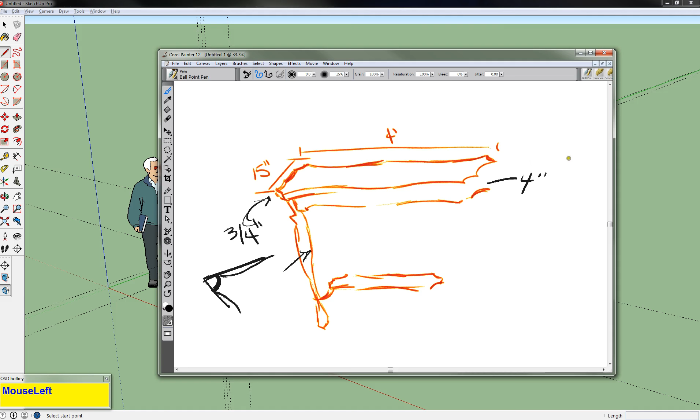So this is a really complicated shape and a very big thing, but it's actually cut out pieces of a simpler shape. So if we think about how we would build this if it were a real table, or how we would build it in SketchUp, those are very similar.

Things like the tabletop is 3/4 of an inch because we generally have 3/4 inch material, or that these 1x4s are probably either 4 or 3.5 inches and not much bigger. The actual table is built with the top and then the skirt pieces line up here, inset 2 inches on each side, and the legs actually sit inside them.

So that's how we're gonna make it. We're gonna make all these fun shapes later. So I'm gonna build it very simply out of components so that our work with all these shapes is gonna be a lot easier a little bit later. So let's go ahead and start that.

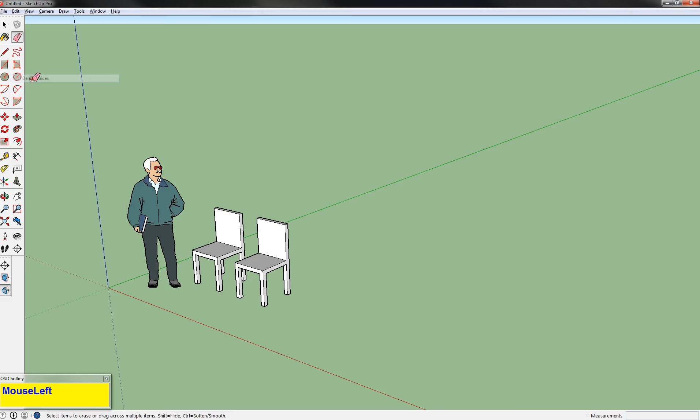The actual SketchUp model I'm working in right now is the same one I built these chairs in, and I want to show you that if you make a lot of guidelines, you don't have to grab the eraser tool and individually erase them. You can go to Edit, Delete Guides, and clear everything out at once. That can be a great time saver.

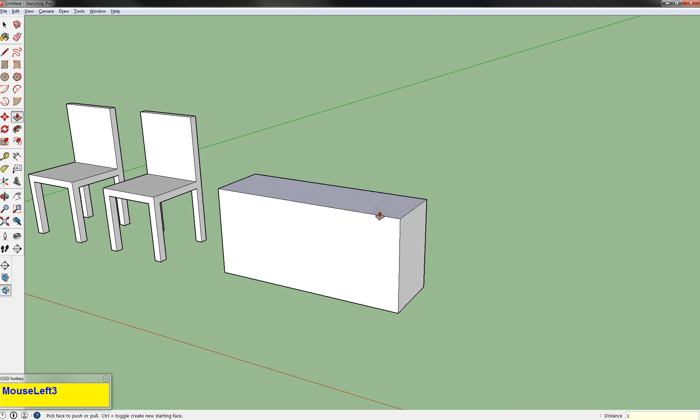So we're going to start on our table with just an overall bounding box of what the table is going to be. I'm going to drag the box this way, and notice that my longer number is first. So I'm going to type in 4 foot, 15 inches, and hit enter. Grab the push-pull tool and bring that up 36 inches. It's going to be the bounding box of our table.

Now, what I really want is the top of this box and the bottom of this box. So I'm going to take the eraser tool and just erase the corners. And as you notice, when I erase those corners, the actual surfaces of the sides just disappear.

Now grab our selection tool again, double click this top, and now it's all by itself, and I'm going to right click and make it a component. When you make something a component, you can rename it. You can name it table top if you would like, but it's not really necessary.

Make sure it says glue to none, and make sure it's clicked replace selection with component. Otherwise you're making a component that's going into your component library, which is a whole other rigmarole, and it's not actually in your model right now.

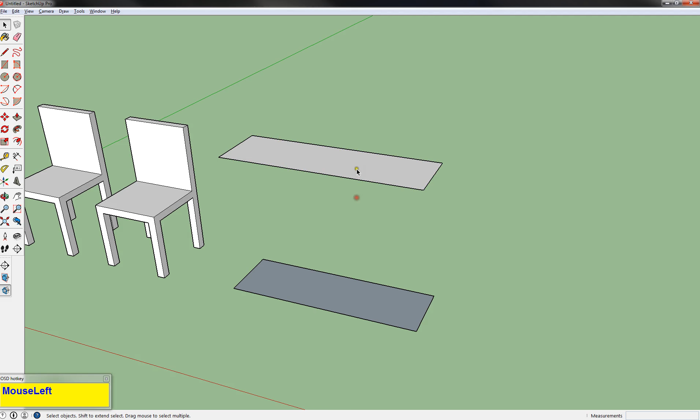So go ahead and click create, and now to edit it, to use the push-pull tool, if I click P, it won't let me edit it. That's because I have to double-click to get inside the component. So I'm going to grab it, pull it down, and type in 3/4 of an inch. Now it's the right size.

I'm going to grab my selection tool again and click out because our top is done for right now. We're going to edit it more later, but for right now it's done. So let's go ahead and make that skirt coming off of it.

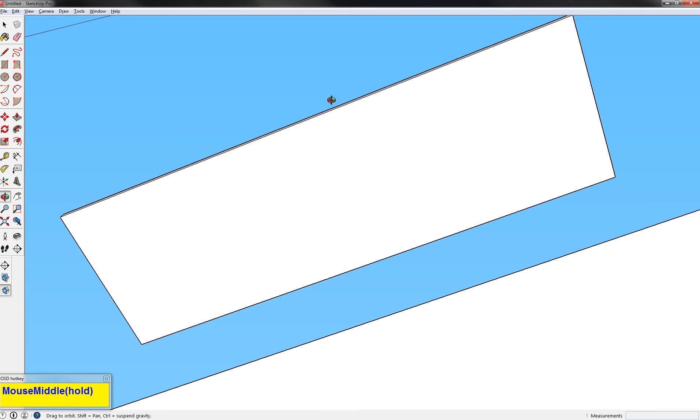I'm going to rearrange so I'm looking at the bottom of the tabletop and grab my tape measure tool. I'm going to pull in from the sides 2 inches on each side because 2 inches was a popular measurement in our chair, so why not stick with it?

Okay, and now because this side of the skirt and this side of the skirt are the same or will be the same, I'm going to make that a component as well because it's something I'm going to replicate. So I'm looking in my bottom corner, and this is 3 foot 8 inches by the depth of whatever I make it. So I can either carefully line that up till it's 3/4 of an inch, just like that, and carefully don't move my mouse and click.

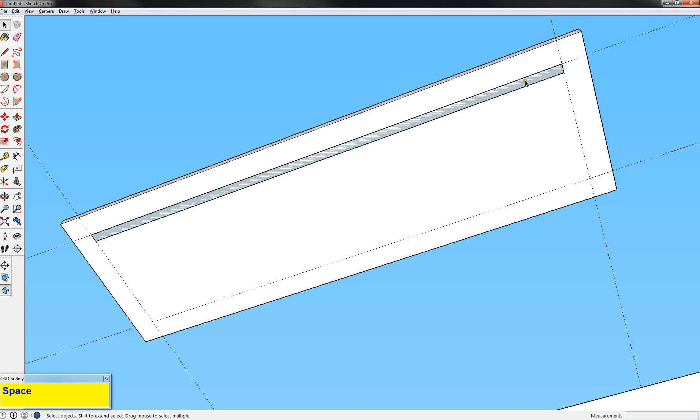Or I could type in the measurement. I'll do that for the next one. So I'm going to hit the space bar, double click while it's a flat object, right click, and hit make component, create. Now I could also make a component with this button right up here.

I'll do that with the next one as well. I'm going to double click inside, grab the push-pull tool, and pull it down 3.5 inches. Spacebar for the selection tool, click out to exit.

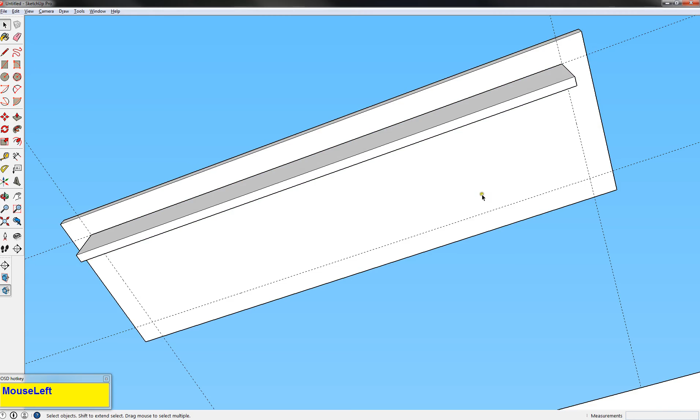Now I'm going to make the side skirt. So again, I can do this a different way. I'm going to go ahead and overlap this other piece that I've created. Because it's a component, it won't stick to it.

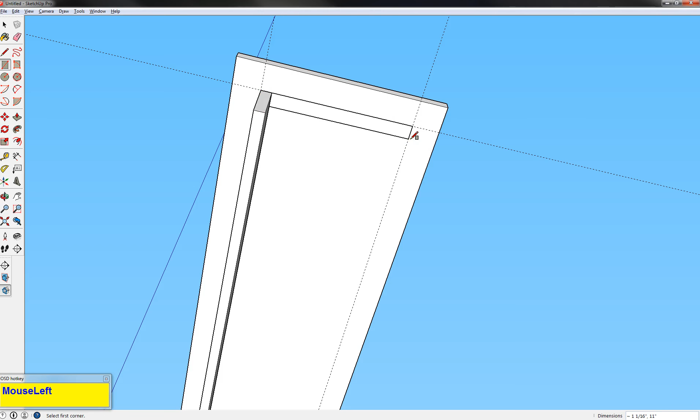So I'm going to click and drag out, and this time it's this measurement, the thickness measurement first, and then 11 inches. So I'm going to go ahead and click to make a box, and then type 3/4 of an inch by 11 inches, enter, and that's the right size.

I'm going to grab the selection tool with the space bar. I'm going to select it. When I select it, I have to click 2 times, but not 3 times, because 3 times might select these components. It doesn't because there's no excess geometry, but you want to do 2 times.

Then I'm going to click the component button, and I get the same menu. Click create. Double click on it to enter that component. Grab the push-pull tool with the P key, and now I'm going to reference this skirt because they're the same height. I'm going to grab the space bar and click out.

So I have my 2 skirt pieces. Now I'm going to go ahead and replicate my components while I'm here to go ahead and finish out that top piece. So I'm going to grab the move key and grab the relevant corner.

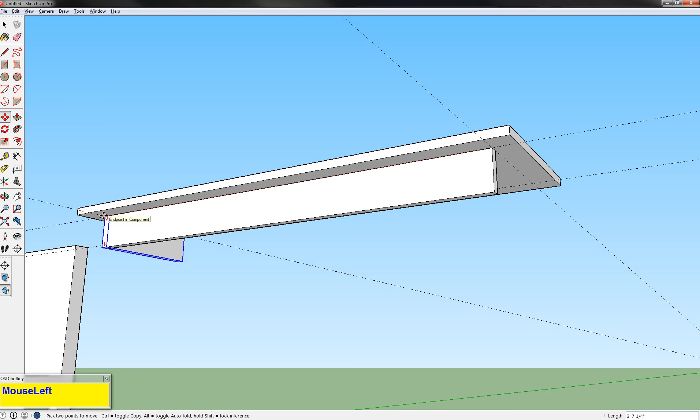I'm going to grab this corner, this piece, and put it right here. So I want to make sure I grab the right corner. I'm going to tap the control key so it's a copy and let it go.

I'm going to do the same thing over here. Once again, the relevant corner is over here. When you're using the move tool, you should space bar for the selection tool, select the whole object, and then M key to select the corner that you want to move.

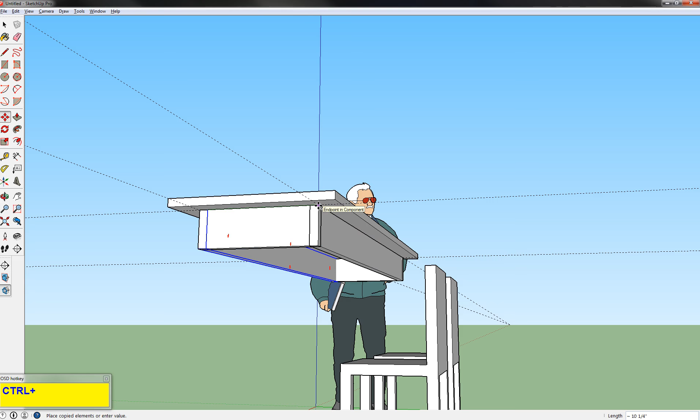I'm going to tap control again so it's a copy, place it right up against that corner, and click. Now I've got an enclosed, copied skirt that will be symmetrical to my tabletop.

Now I'm going to make the legs. And when I was talking about the legs being a little complicated, that's because they are. So I'm going to take the leg, and what I really want to do is place it right here. But other than freehanding and looking terrible, I'm going to use guidelines.

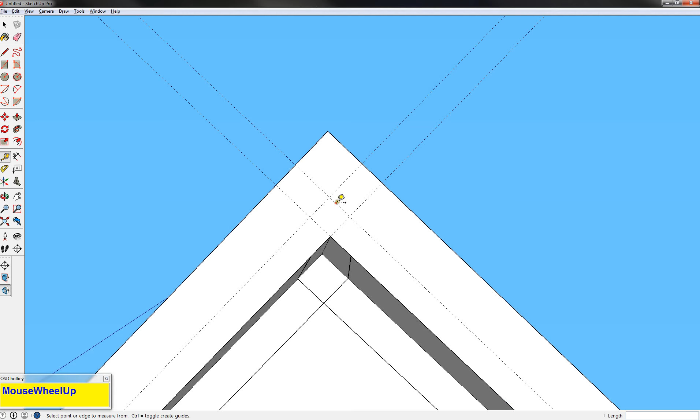So I'm going to pull a guideline out from each of these up against the bottom of the table, and I'm going to make them 3/4 of an inch. Now, that one snapped to 3/4 of an inch because I've made a 3/4 of an inch measurement several times now.

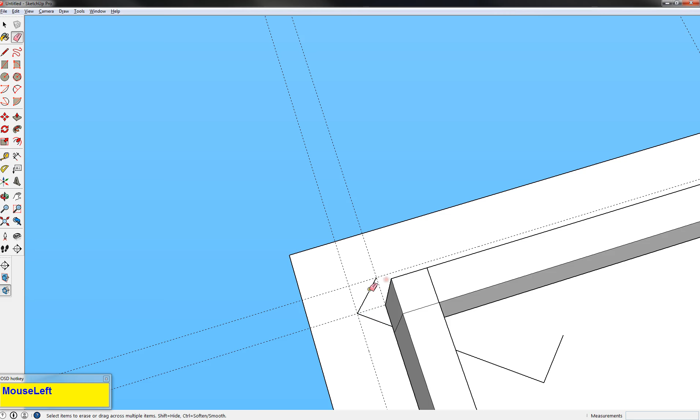I'm trying to find a nice direction where you can see what's going on here. But another thing I want to show you is that if I were to take my line and say, oh, I'm making something right here, oh yay, happy day, this line right here is not 3/4 of an inch. It's 1 1/16, and that is too wide for the lumber that I have.

So I need that to be 3/4 of an inch. So I'm going to grab the tape measure tool, and I'm going to connect those 2 sides, and I connect these 2 sides. And what that means is now I get the center. So I'm going to pull out 3/8 of an inch, which is half of 3/4, if you didn't know.

So I'm going to go out both ways, 3/8 of an inch. Now when I draw this line from this intersection to this intersection, it will be 3/4 of an inch. I will admit that was a lot of nerdy builder math that you probably don't know.

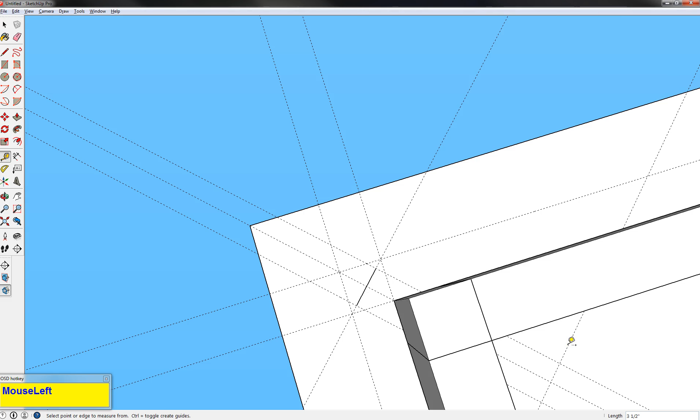I'm also going to make a guideline off this guideline, which by the way you can do. You don't have to use a real line from geometry to do it. And I'm going to make it 3.5 inches. Now I just pulled out to 3.5 inches, but just like everything else, you can look at it and tap 3.5 inches. Now I'm going to grab the line tool and I'm going to make it.

Now some of you might be thinking, why isn't she using the rectangle tool? I'll show you why. Because if I use the rectangle tool, it's trying to make a rectangle on the axis that we're in. So in order to make this rectangle, I would have to change the axis of our entire document and then change it back if I wanted a normal square. Now that doesn't always affect you, but sometimes for just one little piece, you don't want to go changing the axis for your whole project.

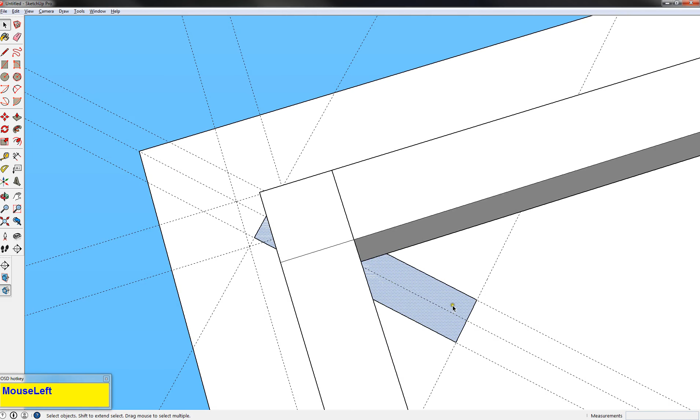Also, this is why I showed you the change guide or delete guides feature, because for this one piece, I have a dozen guides on the screen, and it can get really cumbersome. So I'm going to, once again, double click, right click, and make component. Great, now I have a leg.

I'm going to enter that leg, push pull, and pull it out until it's the height of our ground. It's a little hard to see right now, but there it is. There, it's the height of my ground. I'm going to click. We're good.

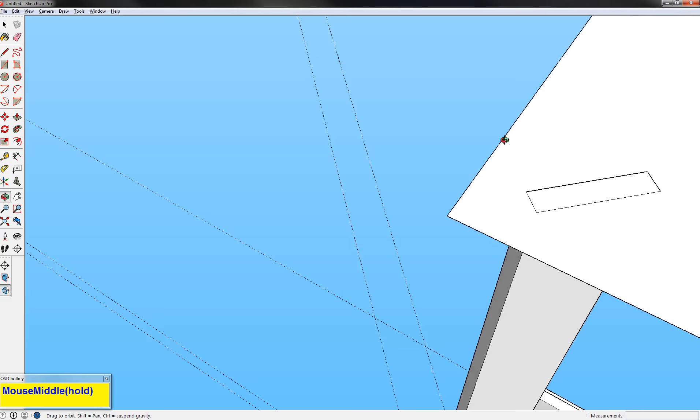I'm going to hit the space bar, click out of that component, and spend some time flipping myself back around to the right side of the world. There we go. I groan like it's actually difficult, but it's not because it's a computer.

Edit, delete guides. Now, to get the other legs in the same position that this one is, I'm actually going to grab this and make guides to the corners, and then pay attention to where this guide is. This guide is 1 3/8 inch in from the edge.

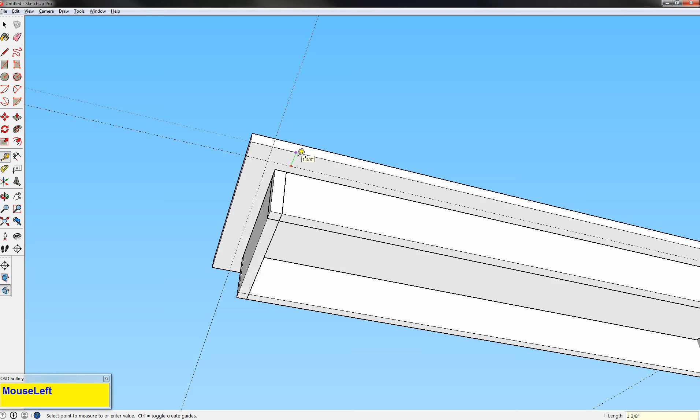So I'm going to make this guide 1 3/8 of an inch in, and this one is the same, 1 3/8 inch from the edge. So I'm going to do it as well, 1 3/8. You see how SketchUp again said, oh, I think I know what you want, and it was right.

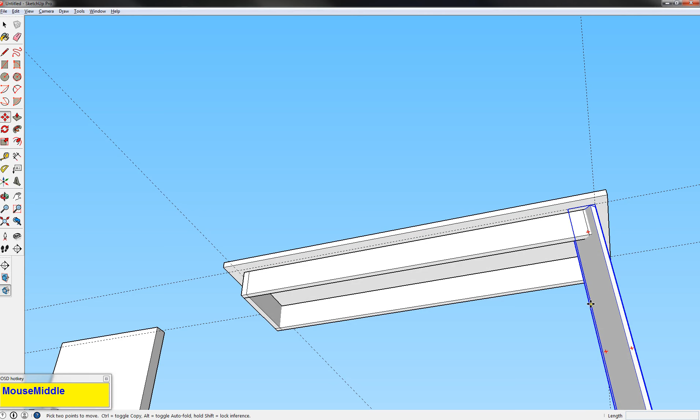So I'm going to grab this leg, and first of all, I want to keep the orientation of this leg the same, because once I cut it out in a pretty form, I want it to be in the right place. So I'm going to grab it, tap copy, and move it this way.

Now I'm going to look at the bottom of it, and when these turn up, I'm going to hover over one of them so I get the rotation tool, click, and spin till it faces exactly the opposite. I'm looking at, when I click on it, where the protractor lines are, and doing the same line on the opposite side. You'll feel when you click on it, every time you move, it wants to tick a whole section at a time. So I'm going to let that happen.

Now I'm going to zoom in, grab the move key, and get it situated right on those two guidelines. The other thing you can do is, again, when I talked about moving, you don't have to move an actual piece of the component. You can grab that edge of the component and stick it on the intersection.

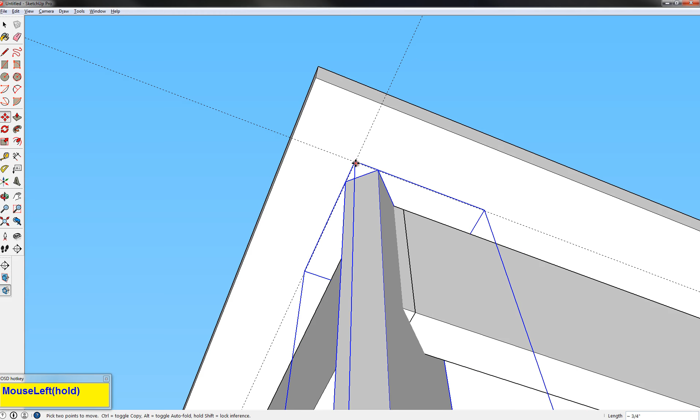Okay, I'm going to do that again, and it seems like a little bit of hard work. It seems like, why don't you just take it and do something else? The reason being, I want this edge to be the outside edge for each leg, so that when I cut them apart as components, they look the same.

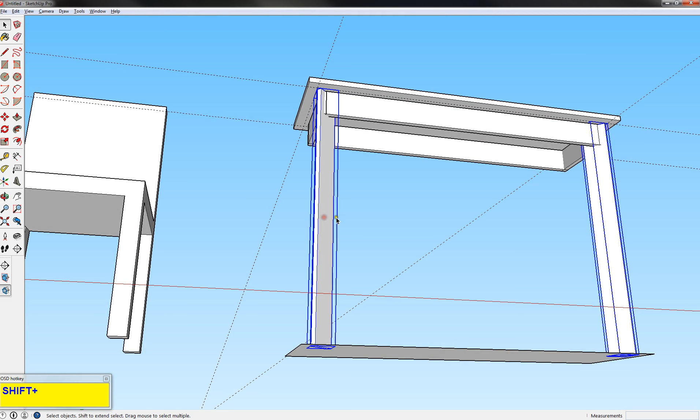So I'm going to grab these two this time, and I'm going to move them, grab them, tap the control key, and just move them back. Now both of them are facing the opposite direction, so I could rotate both of them at the same time and just switch their places.

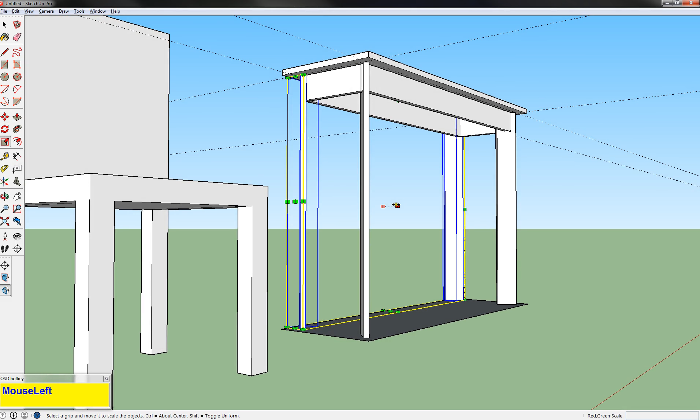There's another thing I can do though. I can grab the scale tool and invert them. By doing that, I'm just going to grab the center point and pull the other way. I need to make sure, if you look in the bottom right hand corner, it says negative 6.61. I need to make that -1. Hit enter. And now it's exactly inverted on itself.

It's exactly mirrored. So I'm going to grab the move tool, grab the end point in the component, and put it on the line. Now they should both be in the same spot, because if the front two are in the same spot, these two should be in the same spot. And they look pretty good. So we're going to go with that.

So that's where our legs will be. Okay? Now we're going to go to edit, delete guides, just so that stuff doesn't get in our way. Selection, click on the bottom so that nothing's selected.

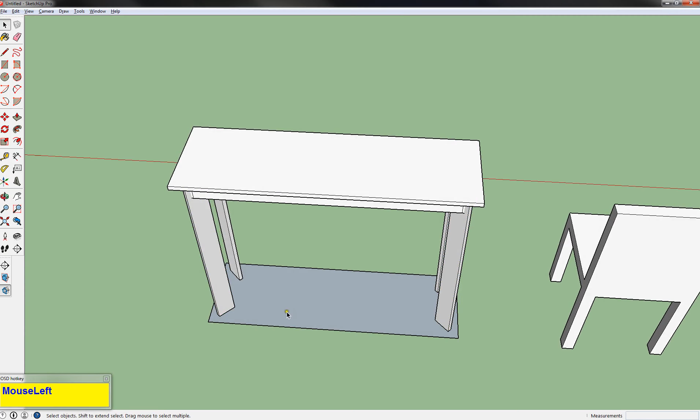Now I'm going to grab the tape measure tool. I'm going to bring our little support piece in from the inside of the legs 2 inches. So I'm going to go there and then come in 2 inches. I'm going to do the same over here, come in 2 inches, and do that on each side.

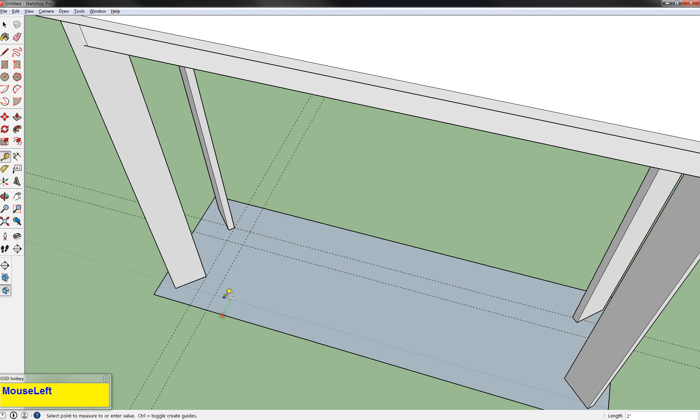I'm going to make sure I touch it, because if I don't anchor that on that edge, it will not be happy with me. Yes, I know this means the bottom piece is very small, and that is correct. You can see that time my thing snapped to it. I will say that looks smaller than I would like, but...

I'll fix that later. Now I'm going to grab the push-pull tool and pull it up, making that 10 inches high, because that's how far off the ground I said I wanted that support piece before. Now I'm going to grab the eraser tool and delete the ground, and delete the bottom, because I don't need it anymore.

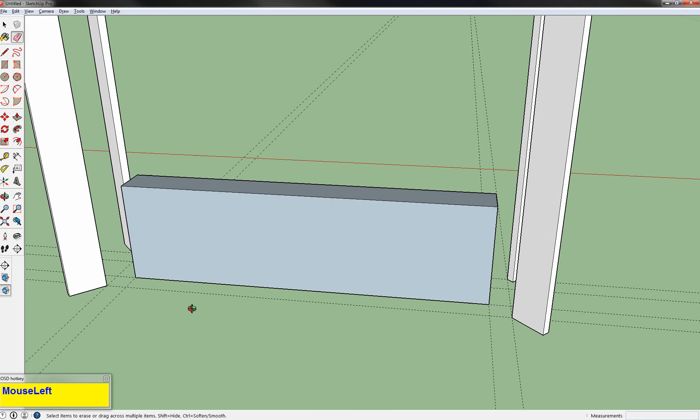What I do need is the bottom of this box though, so I'm going to grab the line tool, complete one edge, grab the push-pull tool, and push up. And I am going to go ahead and push all the way up.

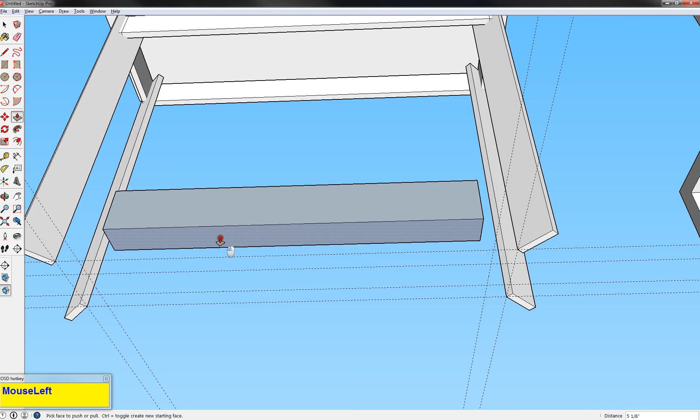No, I'm not. I can't tell where I need to push it to. I know with math that I need to push it up 9 1/4 inches, so I could go like this and go 9.25 inches, and it'll take it, and I know that's 3/4 of an inch.

The other thing I could do is grab the tape measure tool and pull down 3/4 of an inch, make a line, and then pull up to that. So either of those are completely possible. I like to err on the side of less math, and I'm sure you would like to do that as well.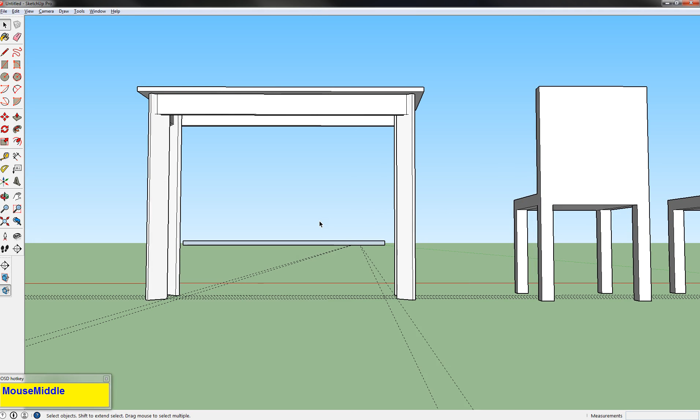Okay, so the last piece we need is the one connecting this piece to this piece. So here's what we're going to do: we are going to make a line on one of the legs.

We're going to double click on the leg and get into that component. We're going to make the tape measure come up 10 inches, because we know the top of this is at 10 inches, right?

And we're going to come down from that 3/4 of an inch. There we go. And that's where we're going to make a line. Oh, I'm sorry - no, that's fine.

I was going to say we should not do this in the leg component because it's a separate thing, but we can build them at the same time. That's not a problem.

So I'm going to make a rectangle on that surface. Now I want to point something out: do you notice how it's allowing me to make a rectangle in this way? That's because actually every component has its own axis, and that can get a little confusing. So just roll with it, because it's trying to help you.

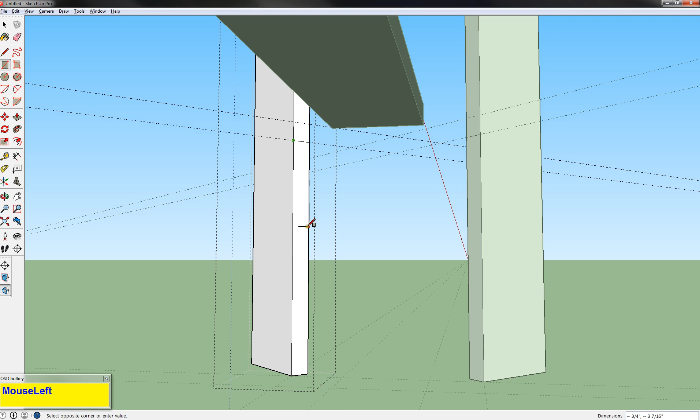We're going to make that 3.5 inches, and this is another one of those times I'm just going to move it until it says 3.5 and click. I'm going to push-pull and pull it until these two pieces touch each other like that.

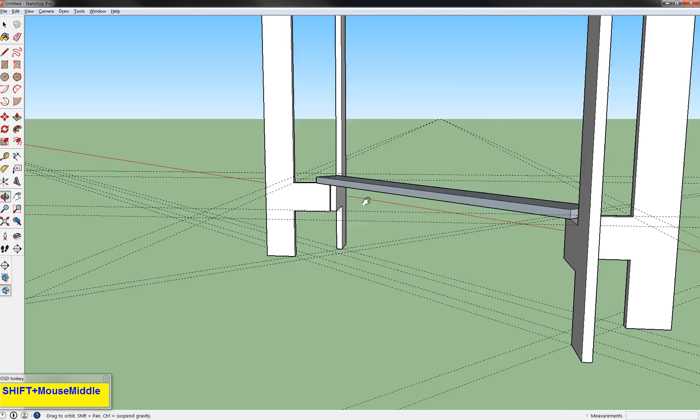So our lovely legs now have a connector to the center support piece. Also, I want to point out that we made those guidelines right there, and they're in all 4 legs, in all the components. You notice how it's making a really interesting pattern, like a Union Jack. So that's one of the reasons we want to make sure we delete guides every once in a while - otherwise we're just going to get a whole lot of stuff in the way.

Now, when I said before that this is a little smaller than I'd like it to be, it's a little smaller than I'd like it to be. So I'm going to go ahead and take the push-pull tool, and I'm going to pull it out an extra inch, and I'm going to go ahead and do that on all sides.

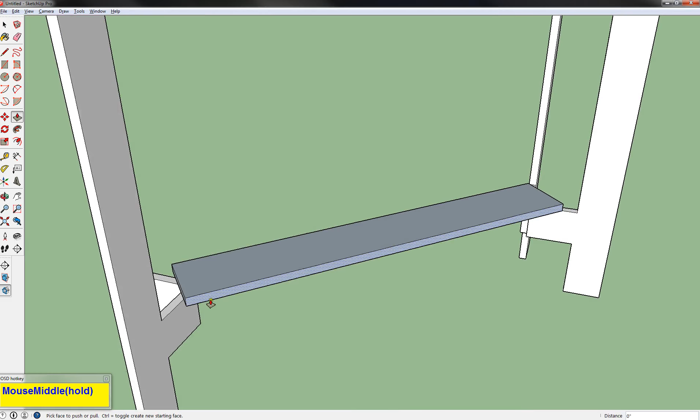So after I did it once, I'm just going to double-click on the other sides, but I need to make sure I'm selecting those sides. When I said Control-Z, I was still selecting the first side for some reason. All right, so that's a little better, okay? So that's our table, very simply.

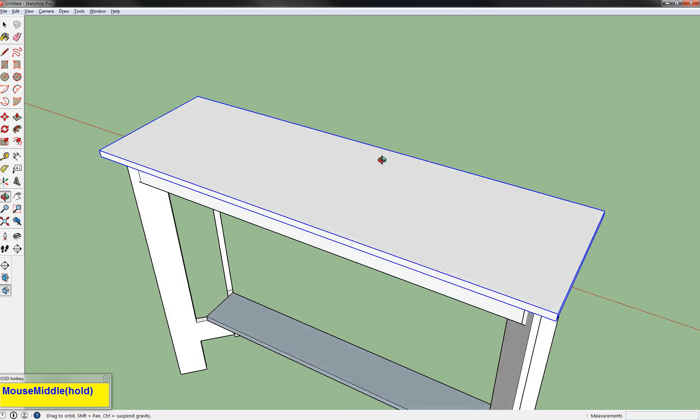The other thing we want to do is make our tabletop actually 4 sides. So what I'm going to do is double click to get into this component, take our tape measure, and make a guideline to the center, and a guideline to the center.

I'm going to grab my push-pull tool, take this side and push it to that guideline, then take this side and push it to that guideline. I know this looks really weird.

Bear with me. I grab the selection tool and click out. Now I'm going to click back in and take the eraser tool, and instead of erasing that side—that does not work, right? Control-Z. I am actually going to hold shift and erase that side.

What that's actually doing is just hiding geometry, not erasing it. But when I'm done, I don't want those lines to appear, so I'm going to go ahead and just hide it.

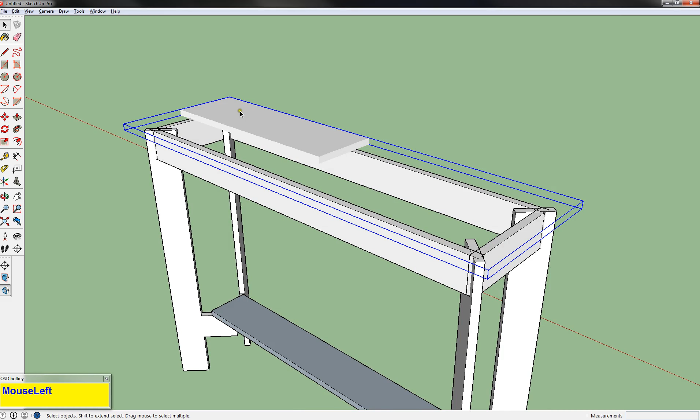So now I'm going to take this. First of all, it's still really big. I'm wondering if there's hidden geometry somewhere that's keeping it so big, but we'll look for that later.

I'm going to grab the protractor tool and grab the center of this piece. Just like the move tool, the rotate tool can replicate things. So I'm going to grab it, and grab this corner here.

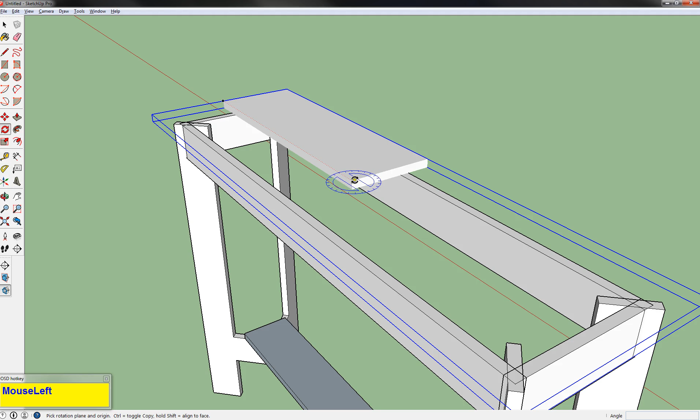Selection tool, select, rotate. Oh, I grabbed the tape measure protractor tool instead of the rotate tool.

So I'm going to click the center, click the extreme, and start to rotate. In addition to rotating, I can hit copy and get a copy. I'm going to rotate it until it's perfectly over here, and now I get the opposite corner.

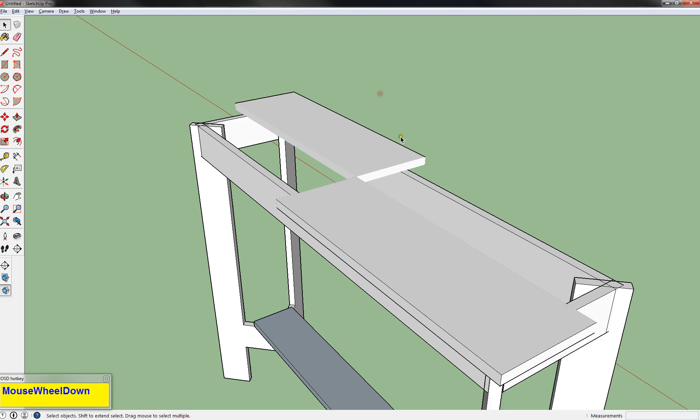I'm going to take my selection tool. Oh, I hit Control-Z and I need to redo. I want to make sure I have both of those selected. I just moved it, but I'm going to undo so that they're in the same place.

Now I'm going to copy paste, and rotate them 90 degrees. That's not right, I need to flip it.

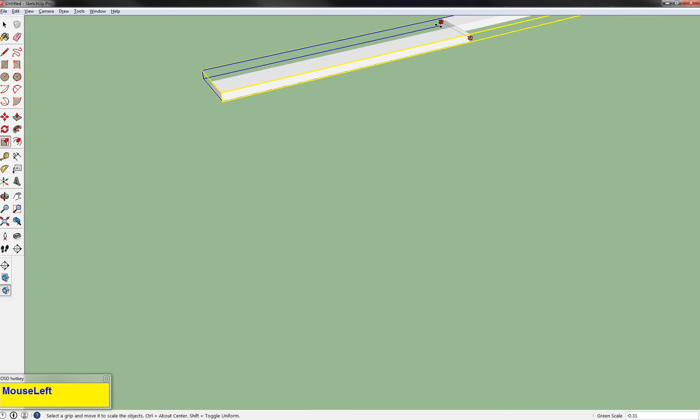Control-Z. I'm going to grab this and flip it center to center. Make sure it says negative 1.

And there we go. Now I'm going to grab those two items with the move key, grab the relevant corner, which in this case is in the middle because I want that relevant corner to match there.

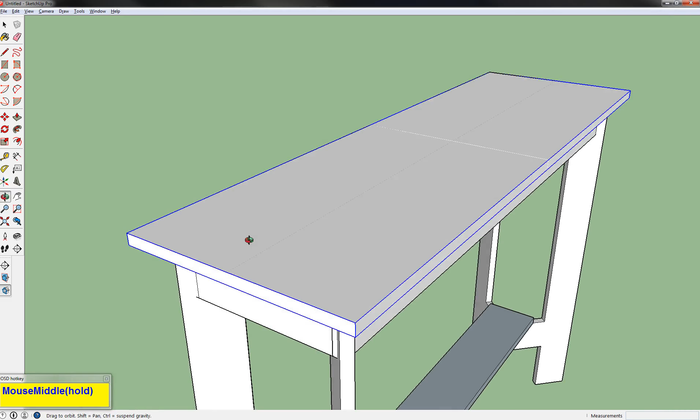Now I know that pretty much looks like exactly the same thing that we had before, except there's a little lineage going on in here because SketchUp is telling us that they're different. But this is actually necessary, and I'll show you why right now.

So we're going to double click on one of these components, grab the arc tool, and I'm just going to make a freehand arc for example purposes. Then I'm going to grab the push-pull tool and cut it out. Now look, that cut is on every corner.

That's why we made it a component, that's why we made it a quarter of the table, and that's why we cut it all the way out. So I'm going to undo that.

All right, so now is the complicated part. I bet you're like, no! Okay, let's do the 2 inches again. 2 inches, 2 inches. We're gonna make a curve that cuts out here and a curve that does this.

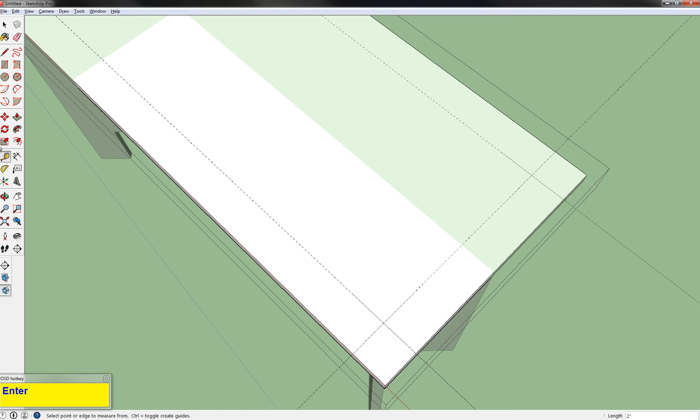So for that, let's go ahead and also do 1 inch and 1 inch, okay? So our curve here is gonna go from this corner to this corner and is gonna come out until my cursor touches that intersection. That'll mean a nice consistent corner.

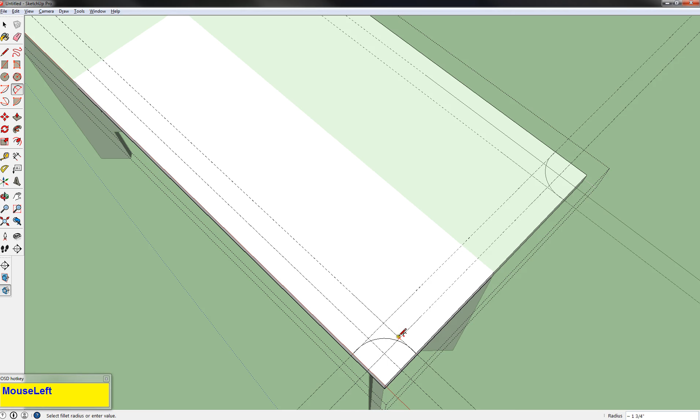Push pull, cut it out. I want to make sure that my leg doesn't show when I cut this out either.

So now I'm going to take this curve and give—actually let's do the tape measure tool again—I want to give this some space, about 3/4 of an inch on each side so that I'm not starting my curve right at that edge.

And now I want to do a nice graceful curve in here.

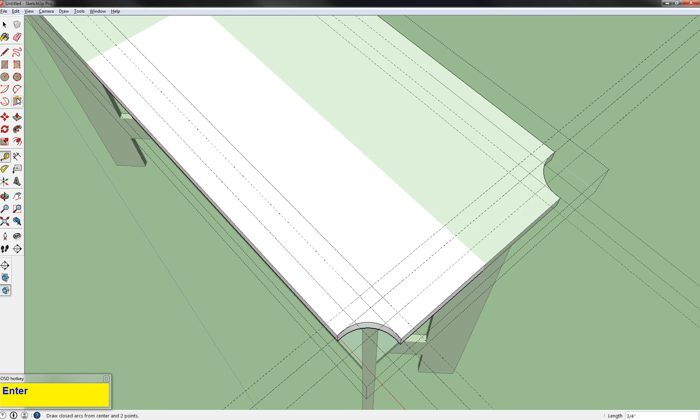So I'm going to do an arc, a 3-point arc, which means I'm going to click here, click in the middle, and click to there. I don't like the way that looks. Click, click, nope. So I'm going to make it shallower. I click here, and I click here.

I don't like how any of that looks. Okay, I think 1 inch is too deep. 1/2 inch, yes. So I'm going to grab the 3-point arc again. Click, click, click.

Well, that looks silly on this side. Click, click, and click back up to the 1 inch mark and do a straight line from there to the center. That way, those two look like they're supposed to meet when they do that.

We are going to do the 1/2 inch over here, and this time hopefully we'll use it. Evidently I lost my 3/4 inch line over here. So we'll go ahead and start our 3-point curve here.

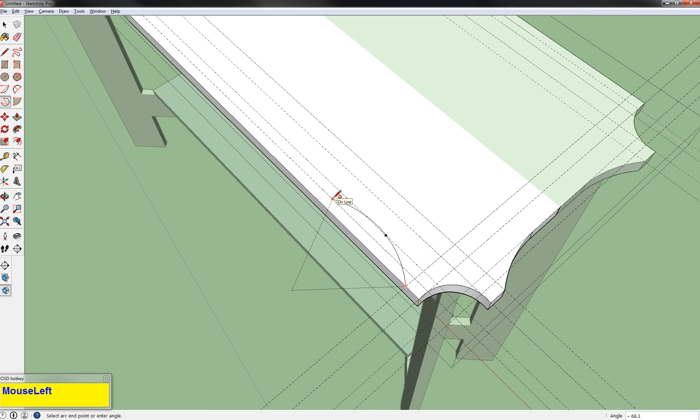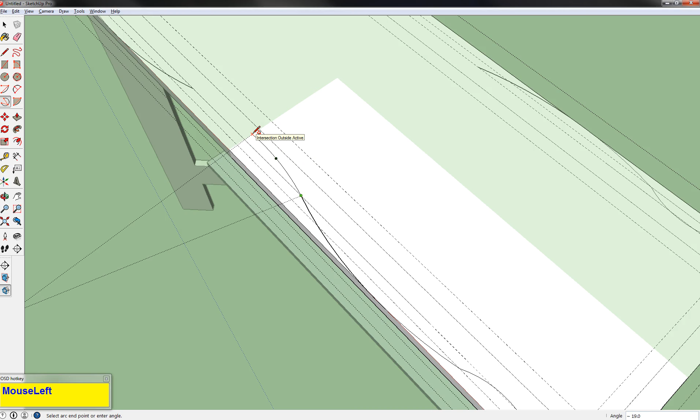Go to the 1 inch line and come back down to the 1/2. And then we're going to make it a curve going the other way from the 1/2 to the 1 inch line. What I want to do is make sure it doesn't go off the edge. I don't want this curve to come out too far. And then we're going to come in the inward direction until we meet the end, like that.

And now I'm going to... now I should note that it's not a push-pullable surface. This surface we can get rid of, we can cut away. This surface we can't, because something happened that it was not coplanar. And that might be because one of our drawing baselines wasn't on an edge somewhere.

We're not sure, so I'm just going to make another line up. There we go, and make sure they're all on the edge. And that's probably because I wasn't careful enough, or this line did go over the edge. And because there's this extra little bit, I'm just going to cut it off.

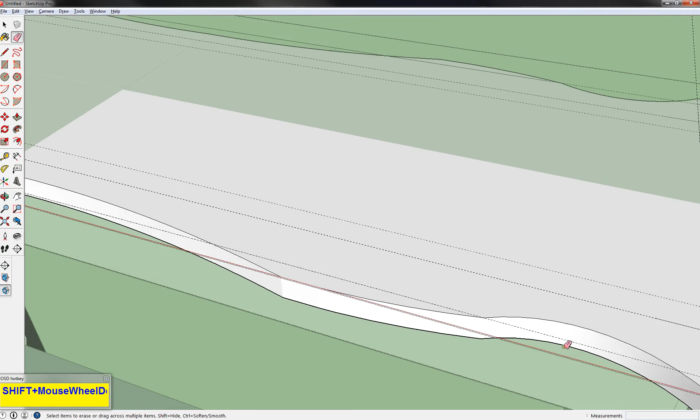Now, if I want to make this look really pretty, I'm going to hold Shift again and delete those curved lines, so that it doesn't look as segmented, as nice and curvy. And now we have a nice curved top without any excess lines.

I'm going to double click in there again and get rid of this line on the edge. And how to do that again is the eraser and the Shift tool to hide that geometry.

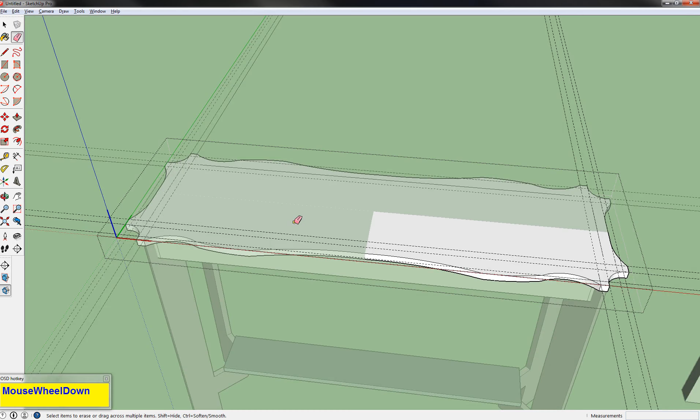I should point out that if we go Edit, Delete Guides, it cleans it up a little bit, and also that if I also go to View Hidden Geometry, I can see all those lines that I deleted and all those edges that I hid. They're not gone, they're still there, just hidden in Hidden Geometry. So I'm going to go and unclick Hidden Geometry so that we don't see it anymore.

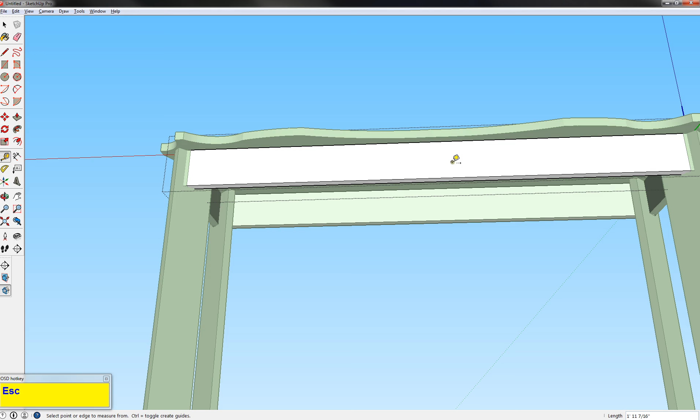So that's our tabletop, and we're just going to do things like that again and again. Now, we could, if we wanted to, for these two skirts, do the same thing where we split it into 4 pieces, or in this case 2, so that they're definitely symmetrical. But I am just going to...

work on one skirt. To do that, I'm going to go ahead and select this leg and hide them. So I'm going to right click on them and click hide. This way I can see the ends of my component the way I couldn't before. So I'm going to grab the tape measure tool and pull the tape measure just to the midpoint.

So instead of doing a bunch of these, I'm just going to duplicate it on both sides. I don't think it's necessary for me to go through all the effort of copying this component when it's not going to be that hard for me to draw.

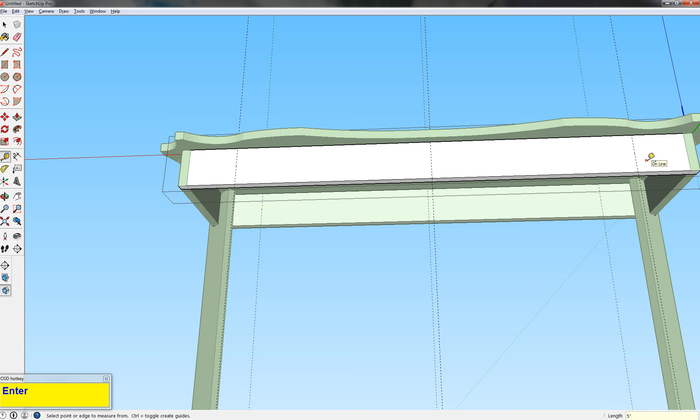So I'm going to come in from this side 5 inches, and 5 inches from the other side, and the midpoint line. I'm going to come up from the bottom 1 3/4, looks just fine.

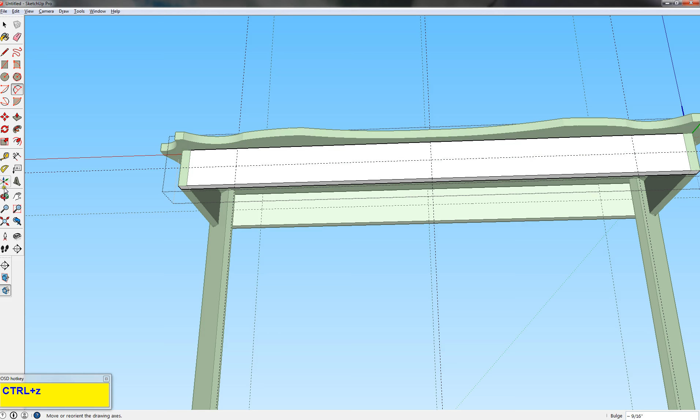So I'm going to make an arc, like that. Whoop, I need to use guidelines or you're not going to know what measurements I have in my head. I'm going to do 2 inches again, because 2 inches sounds like a fun time.

2 inches. This time when I make the arc, I'm going to use the center point arc, and I'm going to click each side, and you see how it turns blue? Come on... just see how it turns blue? It turns blue when it's on a good tangent to another line.

It's not wanting to turn blue in the opposite direction. So I'm looking down at bulge and it says 1/2 inch. I'm going to go ahead and click 1/2 inch. It's because there's no line up there, so I'm going to do the same line over here, 1/2 inch.

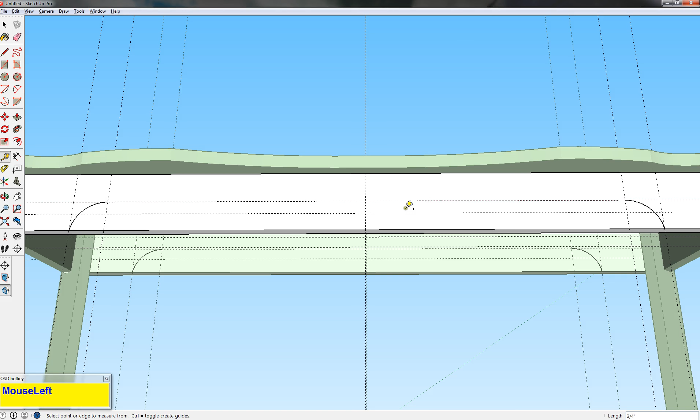I'm also going to draw a straight line, pull that down 3/4 of an inch. I want to make a curve that curves down and out and comes back to be straight right here, so I'm going to do my 3-point curve and come down and then come back out.

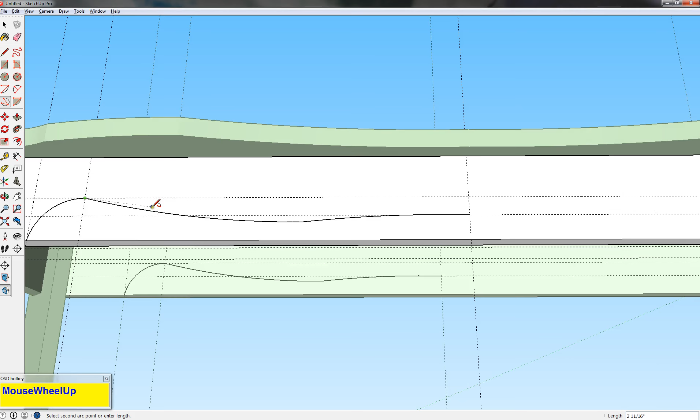I don't really care what that is, it's fine if you kind of make it up. The other thing is I do want it to curve back down over here, so I'm going to add a second line over here and just make it match up. Now that it's matched up, I'm going to grab the eraser tool and erase that, and now it's going to make one continuous curve. Except the curve looks like poo.

Rule number 2, don't make it look like poo. So I'm going to do that. None of those are good. Eraser. But now that curve is too much, so maybe you should just make it look good. Essentially that second line I drew was just terrible, is what I'm telling you.

Now that I've got that all worked out, I'm going to select all 3 of those line segments by holding Shift and clicking on them. I did not click on other things. I'm going to copy, paste. Hey, look at copy, paste. Ain't that a great thing? I'm going to make sure that I'm clicking on the surface somewhere else.

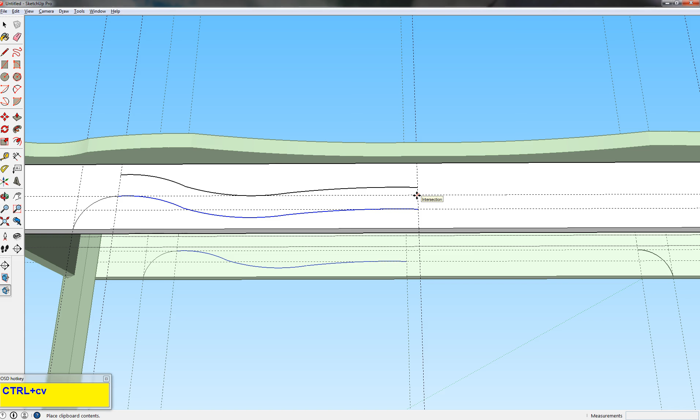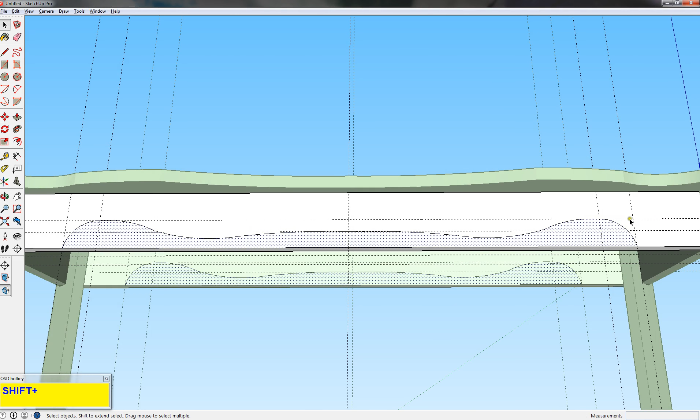Now they're selected. Now I'm going to grab this scale tool, and I can do the same thing I did before. I'm going to invert it, make sure it says -1, enter, and then grab the move tool, grab the end, stick it on there. And I should touch over here, let's see if I do. I definitely do, I know I do because this is one solid surface that I can extrude out.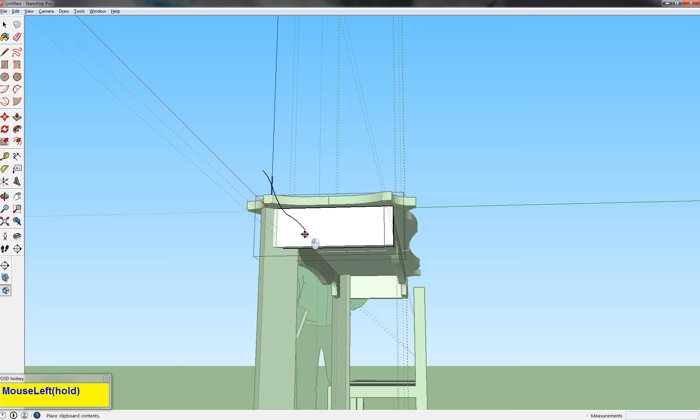Extrude out away. Awesome. Now I'm going to do the same thing I did over there, over here. And because I'm doing the same thing, now that I've double clicked on this surface, I'm going to hit paste. I'm going to make this little section a group.

I'm not going to be able to easily cut that out, or easily turn it and make it coplanar, and that's going to be more of a pain in the butt than just drawing this again. So I'm going to go 5 inches, and that's what I thought. Because I'm very close to the center here, I'm just going to end up making a little semicircle.

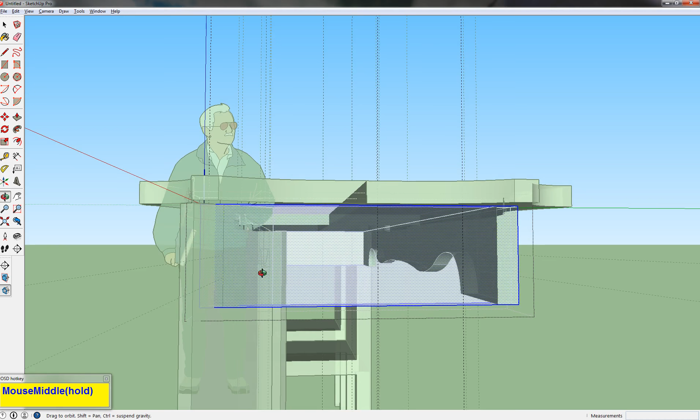So I'm going to grab my tape measure and just do 2 inches from both sides. I'm going to make my face style x-ray because I want to see this corner come out 2 inches. Went the wrong way, I want this face right here, 2 inches. There we go. Click the end, and pull up and make a bulge.

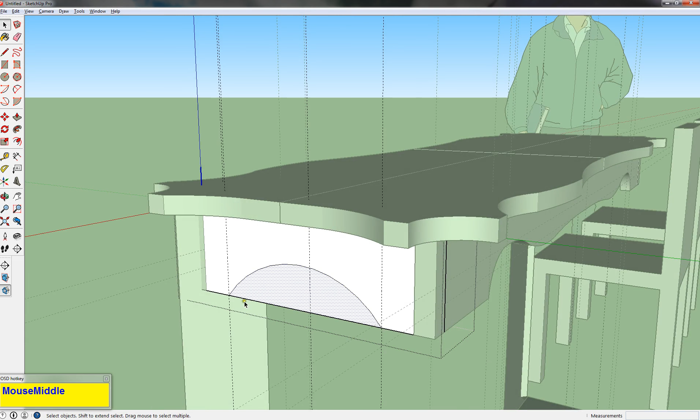I'm going to turn x-ray back off so you can see what's going on, so it's not as confusing. But I just made a curve with the arc tool. Now I'm going to push it out. There we go.

So this part gets really hard to see, so if you want to hide that other leg again, that's perfectly fine, I would recommend it. Also, since I didn't delete guides from the other apron, it's really hard to look at, so edit, delete guides. Now I'm going to bring back those 2 legs. To bring them back, I go View, Hidden Geometry. Now I'm going to right-click on those items and say Unhide. Right-click, Unhide. All right.

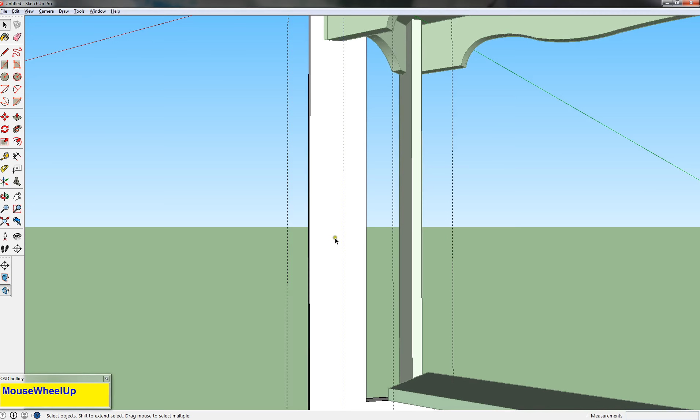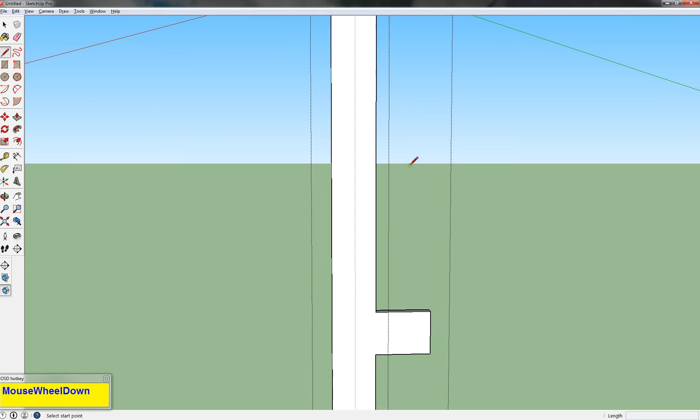So that's all nice and pretty. Now we're going to prettify our legs, double-click on it, and you're just going to do the same thing we have been doing. Here's another thing you can do: if this becomes really hard to look at, and you can do this for your top pieces as well, grab the Move tool, click on it, make a copy, and move it out into the middle of nowhere. Now that it's in the middle of nowhere, it's easier to see all the stuff you want to see. You can draw straight on it, and it will, of course, be affected just like the other components.

So I want to cut that out.

Go ahead and just make up something that looks kind of pretty. If you want to follow what I'm doing, I'm just trying to make some curves that go both in and out. One thing you should notice is that you get this blue line, and that blue line is keeping it tangent, which is quite useful.

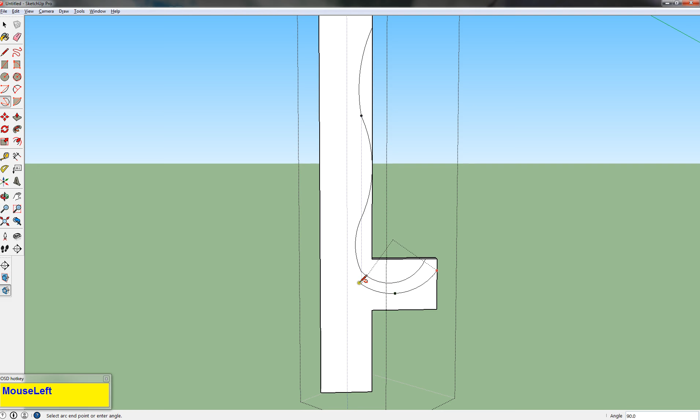I'm going to make this piece arc out here and support the underside of the centerpiece. You want to make sure that while you're doing this, you're drawing on the 2-dimensional surface, because if you make a loop that comes straight out, it's not going to help you. Also, if you overlap—

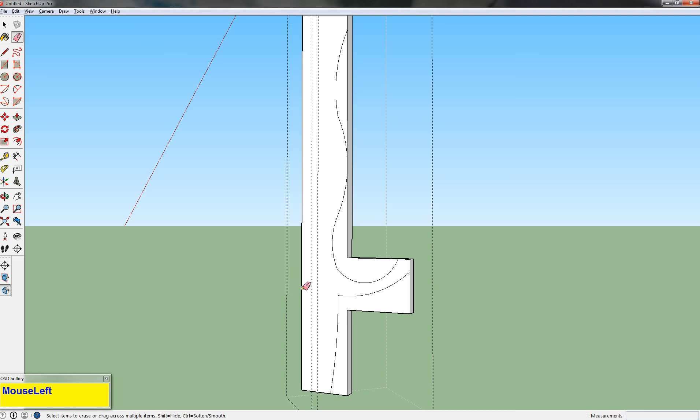That's absolutely fine. As we talked about, because SketchUp has sticky geometry, it's going to force all these things to work for you. So if I erase this and erase this, that's all one unit, and that's fine. So that's a pretty back side of the leg, and now I'll do the front side of a leg.

Curve this way, and then a more sweeping curve this way, and I'll follow this in. The accuracy of how you draw this leg is not going to be a big deal, just make it curvy and pretty, because replicating this look is fine. I want you guys to be able to make some two-dimensional shapes. If you decide to make something up, it will be a lot easier than trying to replicate all of these things exactly.

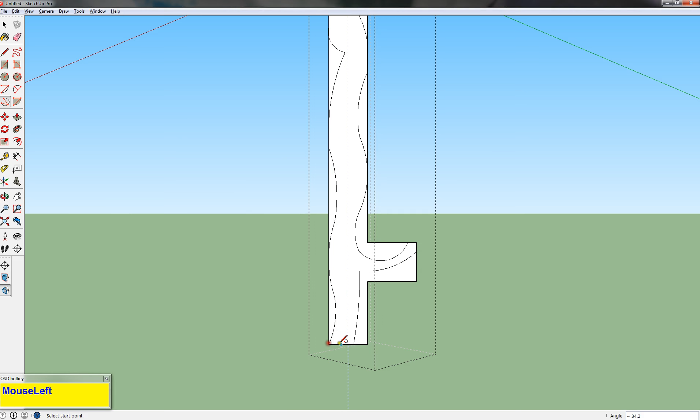Grab your push-pull tool, push out all that extra stuff. You may need to turn—that last one got a little difficult for me because the computer is having a hard time knowing which way I'm trying to go. So that interesting looking leg on our table looks like that.

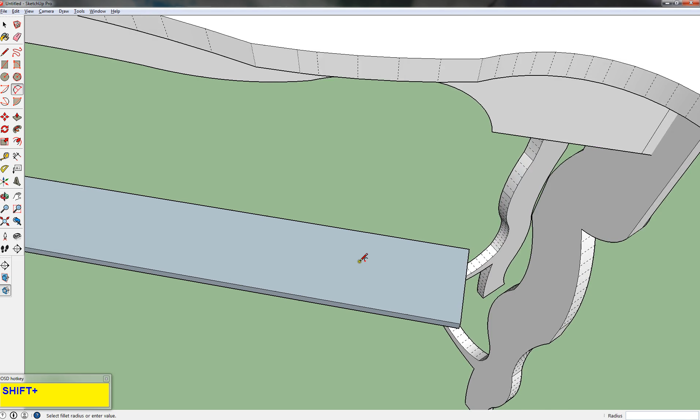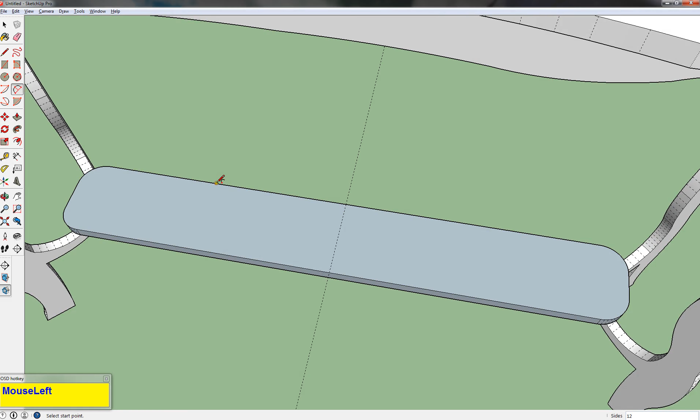There we go. I am going to grab the tape measure tool and pull it to the midpoint. I'll also go 5 inches in on both sides—that way it still has some symmetry. And I'm going to grab my arc tool and click on both these intersections, then pull it up just a little bit.

Same on the other side, and pull it up just a little bit. Push-pull tool, cut it out. And now all that looks like a fancy, intentional table.

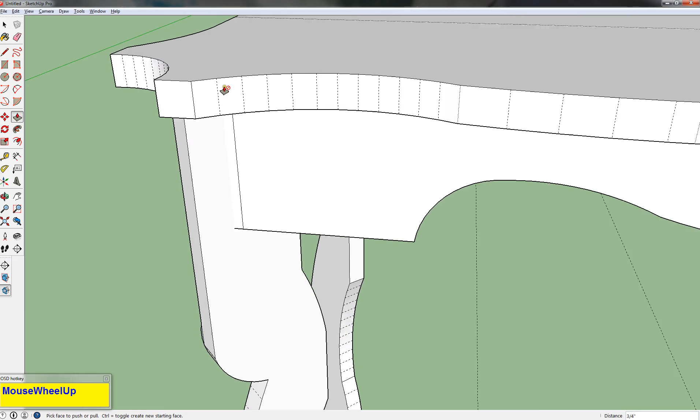While we're at it, I want you to remember that you can do the same thing with a chair like this, or with any individual object that you're playing with. If you have some uncomfortable or awkward geometry, like this line right here, you can't delete it, but you can hide it, and now it's not as noticeable.

Remember to delete all your guides before you turn in your project, and remember to name it properly. But this is a nice, fancy, complicated table that really wasn't that complicated to make, and it uses some basic principles that SketchUp has that we've learned to try and make a complicated shape.

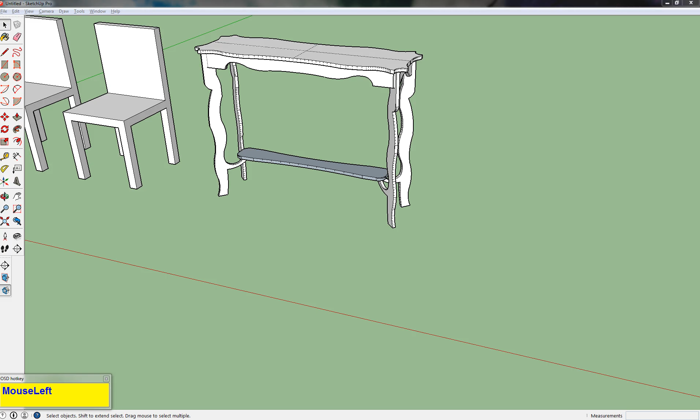We used components to make sure things didn't stick to each other and make it so we didn't have to make multiple legs or surfaces. We made a perfectly symmetrical top and perfectly symmetrical apron to this table by using components. We used the rotate tool, the move tool, the rectangle, line, and tape measure tool extensively, and we also learned how to mirror things. So I hope you're able to take those skills into your next projects.